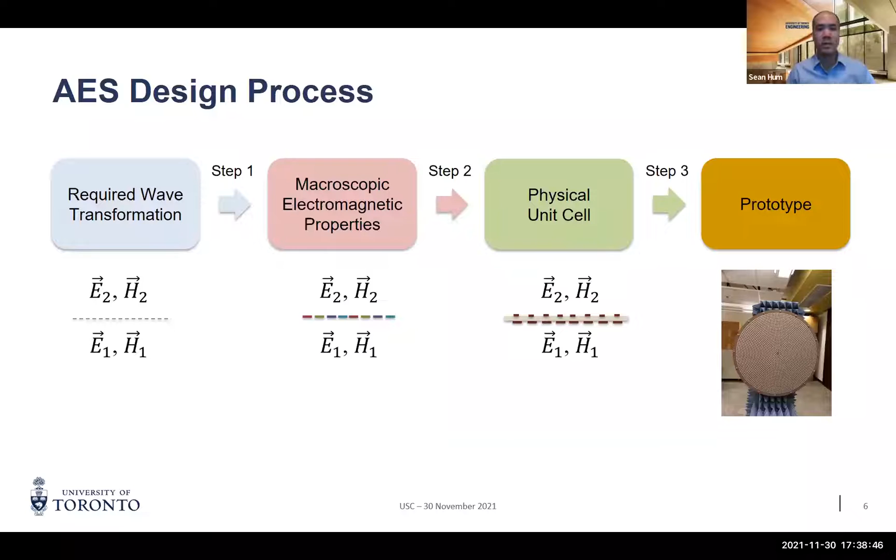Then you need to translate that, after step 2, into a physical unit cell composed of dielectrics and conductors that actually carries that out. And then, of course, the last step is to prototype it. So the talk today is really going to talk about all of these steps, and that's roughly how I've organized the presentation.

We'll start with the macroscopic step, which uses optimization methods to accomplish that. Then I'll talk about two different unique design methods for the microscopic step, one using equivalent circuit models, which are nice and easy to understand and build a physical intuition around how these surfaces work, and then a more advanced topic using a data analytic approach based on machine learning. At the end, I'll show you some experimental realizations of these surfaces.

So let's begin with the first step, which is the macroscopic step. This really concerns the design of the AES's surface parameters. We can use a variety of parameters to define an AES. For example, we can use surface impedance, surface admittance, and electromagnetic coupling coefficient, if we have bianisotropy, to define a surface.

We could use susceptibilities, both electric and magnetic susceptibilities, to define the surface. We could use polarizabilities. We can even use S parameters or other network parameters to define how a surface works. And all of these parameters are functions of position. As we walk around the surface, they spatially vary to accomplish some sort of transformation of the field. They could be uniform, in the case of something like an FSS, but generally they vary as a function of the atomic position.

And I'd point out that all of these surface parameter descriptions are interchangeable. So some people like to use susceptibilities, some people prefer to use surface impedances. You can convert from one to another. In fact, in the old days, sometimes we just defined things in terms of the phase gradient that we want to realize from the surface. But nowadays, we tend to focus more on these mathematical descriptors of the surface.

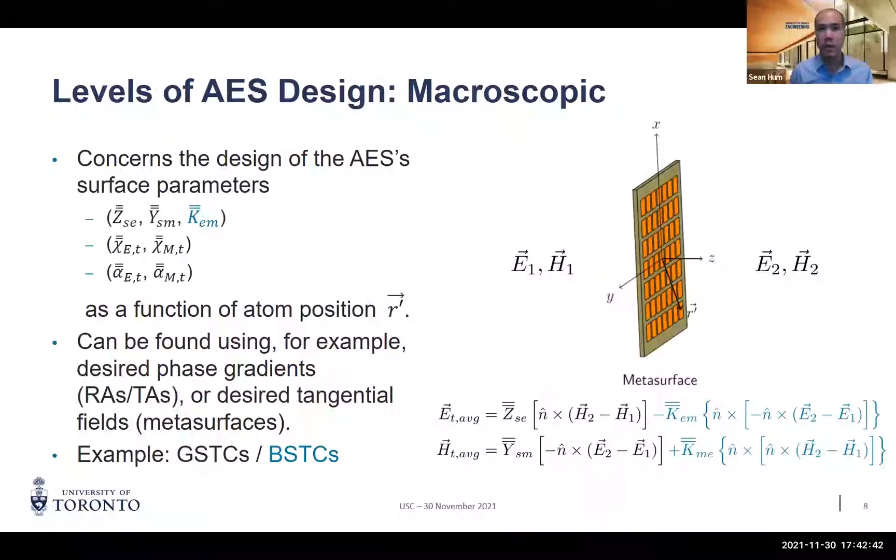So without knowledge of the exact tangential fields at the surface, we can't go and solve these equations for the surface parameters, right? Because we actually don't know E2 and H2. And even if we did know E2 and H2, it can still be complicated because you have mutual coupling between the elements in the surface. And if that mutual coupling is significant, then one element can affect the response somewhere else on the surface. And then the surface is what we call a non-local response, and that complicates the design.

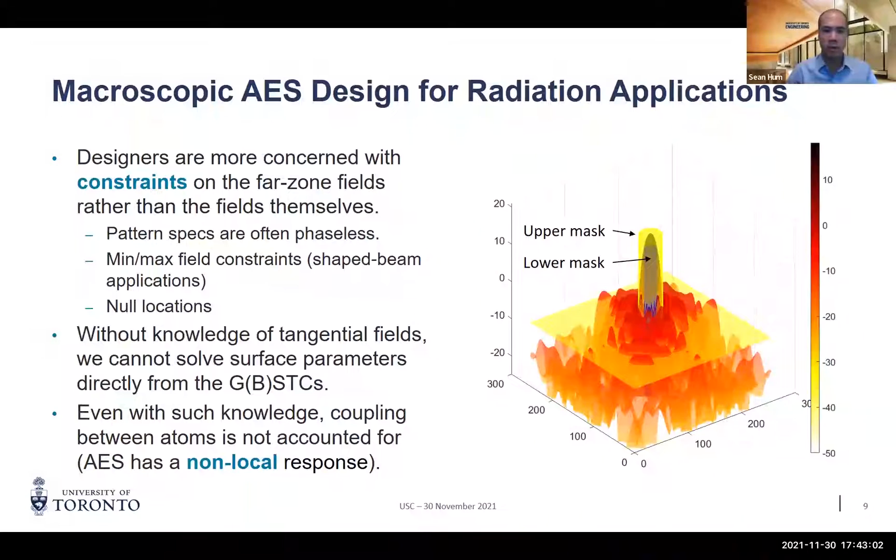So the macroscopic design step is designed to try to address this. At the microscopic level, this is really where the black art or black magic around designing electromagnetic surfaces comes in. You can see these many weird and wonderful ways of inventing the atoms in these metasurfaces. And generally their design requires tedious analysis and a full wave simulation package. You adjust some parameter or some configuration of the scatterer, and then you run the simulation again, and you see if you've achieved the surface parameters that you're looking for.

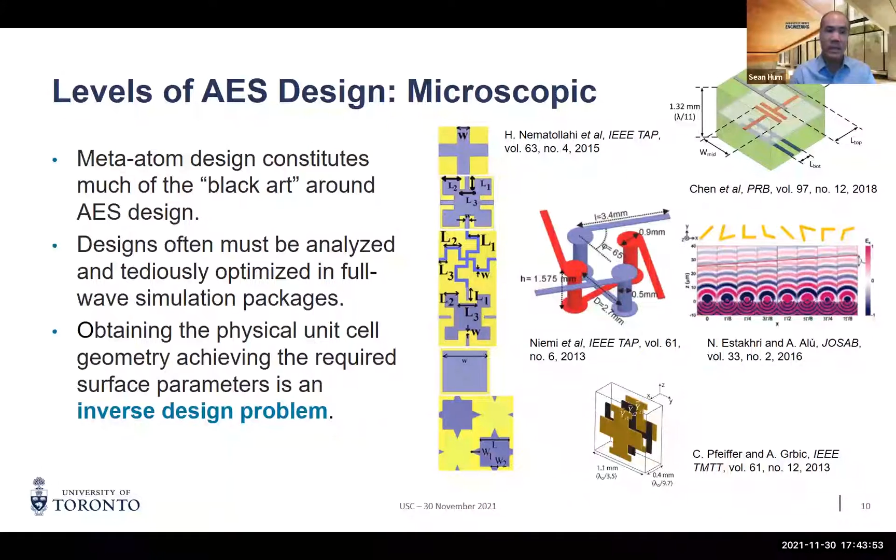So ultimately, as a designer, our goal is really to do the opposite, right? We would like to specify what the surface parameters are and have a tool that spits out what are the geometrical dimensions of the scatterer, right? And that's called an inverse design problem. We're going to be looking at that in a bit more detail later.

Before we get into that, I'll talk about the macroscopic design step. To accomplish this, we've been using optimization methods inspired by convex optimization, but that we've had to relax using Lagrangian methods. So as I said before, the usual process is: if you know the field transformation that you want to accomplish with the surface, then it's easy. You know the tangential fields on both sides of the surface, and you can determine the appropriate surface parameters that the surface needs to realize.

In this talk, I'm going to focus on this impedance and surface impedance, surface admittance, and electromagnetic coupling coefficient tensors to describe the surface. So knowing the fields, we can then solve for the electric and magnetic currents on the surface, and then solve for these surface parameters. And this has been done before by others.

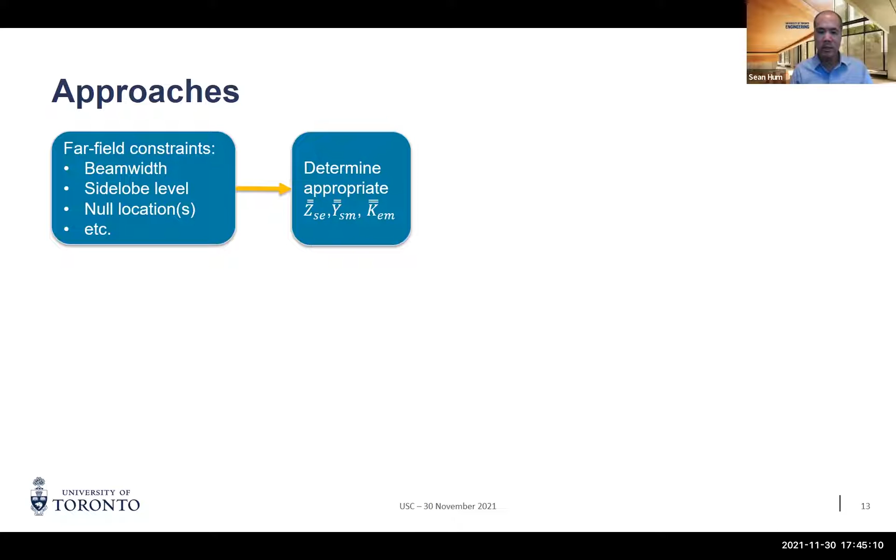So what we want to do is get away from that and actually just constrain what the fields E2 and H2 are going to be. We talked about what some of those constraints look like already. We might specify the beam width or side lobe level or null location, something less specific than specifying the field itself. But now we don't know the tangential fields, we only have these far zone constraints. And so now we've got a problem in trying to determine these surface parameters.

So there have been some approaches in the past to try to circumvent this problem. In the field of reflectarrays, there are these phase-only synthesis procedures based on intersection methods that try to solve for the reflectarray elements as a function of position that you need to realize a specific phase or a radiation mask. Our approach is a little different. We want to try to modernize this and bring techniques such as that into the world of metasurfaces, where we actually have control over 3 sets of parameters, not just the phase: Zse, Ysm, and Kem.

Our approach is to try to use convex optimization to determine these surface parameters from far field criteria. I say attempt because we can't actually use a convex method directly.

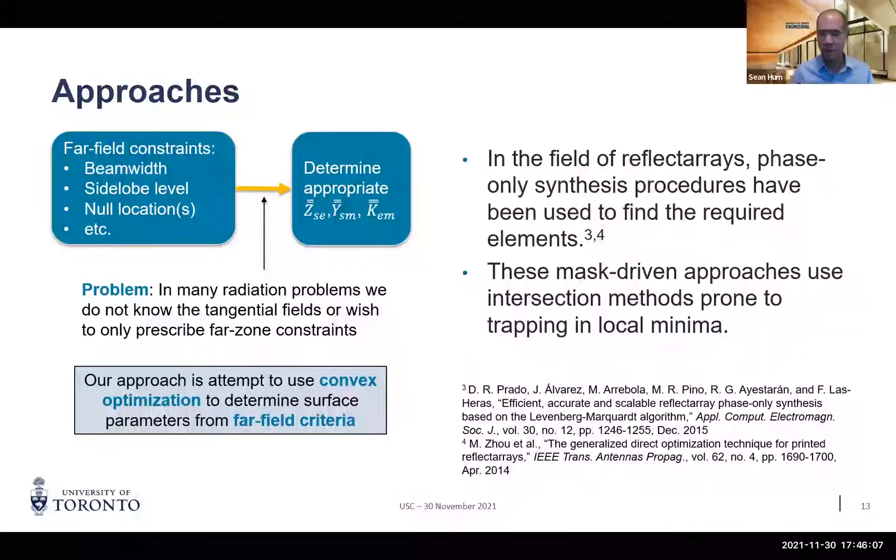Let's start with a system description, and we'll do this in 2 dimensions to make it easier. Here's our AES lying along the y-axis, and we'll subject it to some incident field, and there'll be a reflected field generated and a refracted field, and they might be plane waves, they might not, but this is just a general diagram. And we have the electric field integral equation here relating and constraining basically the electric field at the location of the surface, or the tangential fields at the location of the surface.

So we know that the sum of the incident and the scattered field has to be equal to this sum of products here, where again we see the surface parameters, 2 sets of the surface parameters entering into the electric field integral equation. So we may have electric surface current densities as well as magnetic surface current densities on the surface. The scattered field we can compute knowing the electric surface current density, and we just use a 2D Green's function to compute that.

What we'll do is break these surface currents, J sub Z and M sub Y in this 2D example, and express them as a superposition of basis functions, because our goal is to form a linear system of equations a la the method of moments to form a 2D description of our system. So we'll break down the electric surface current density into a series of basis functions, and use the same basis functions for the magnetic surface current density.

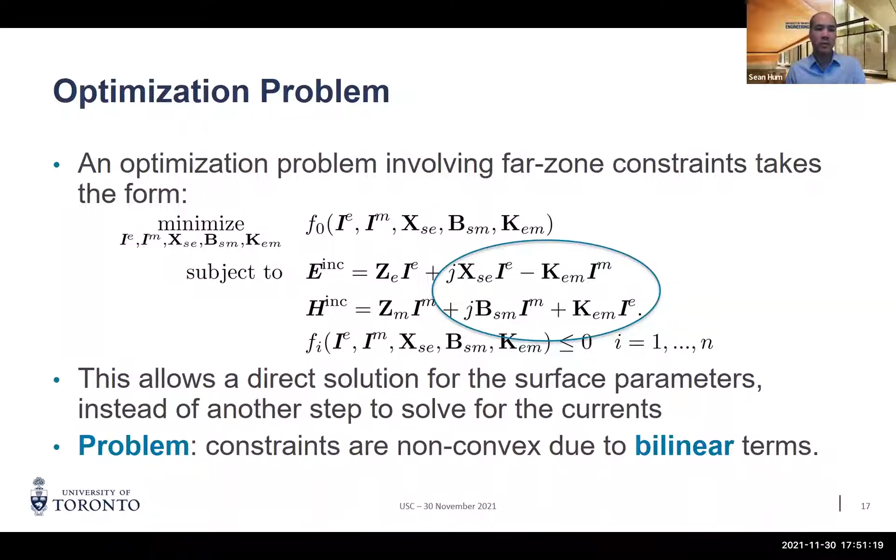We're actually multiplying two of our unknown quantities together, right? So this is called a bilinear variable. This makes the problem non-convex, and we need to find a way to solve this optimization problem by some other way. So what we do is we relax it, and a relaxation is a way to solve a non-convex problem by enlarging the solution space.

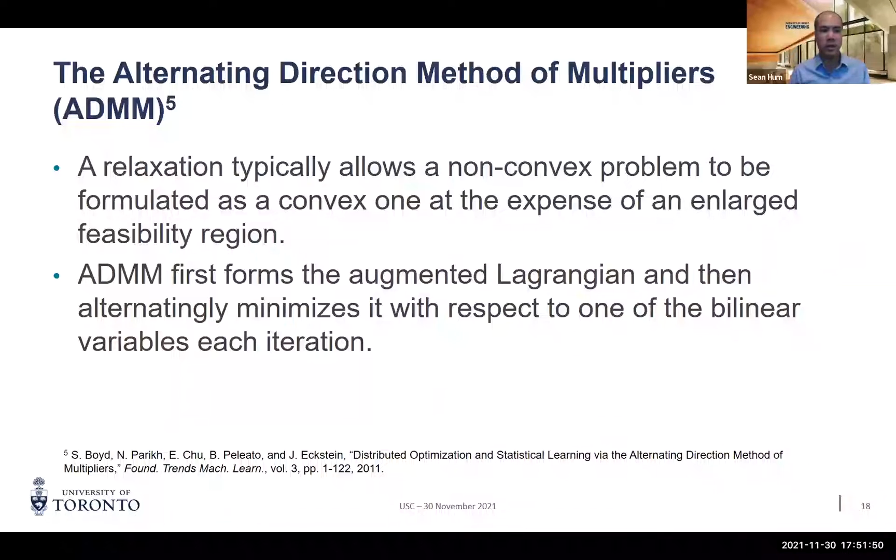We use a special technique called the alternating direction method of multipliers, ADMM, that forms a dual problem, an augmented Lagrangian, and alternatingly minimizes it with respect to one set of the bilinear variables at each iteration. So if we return to our problem here, this is the one we showed earlier. The so-called dual problem of this is minimizing this Lagrangian here. And if you solve the dual problem, you solve the primal problem.

Here's a dual problem where we're trying to solve for just the currents in this optimization problem. It's called an augmented Lagrangian because we actually add these penalty terms to improve the convergence of the optimizer. So that's what makes it ADMM. In this step, we solve for the surface currents, but then in the next iteration we'll try to solve for these surface parameters, and we just alternate back and forth. That's why it's called ADMM.

So this is a big, ugly flowchart of what the algorithm actually looks like. This is one iteration solving for the currents, and then the next iteration solving for the other set of variables, the surface parameters, updating the problem, checking for convergence, and then looping back and repeating until this optimization problem hopefully converges on a solution.

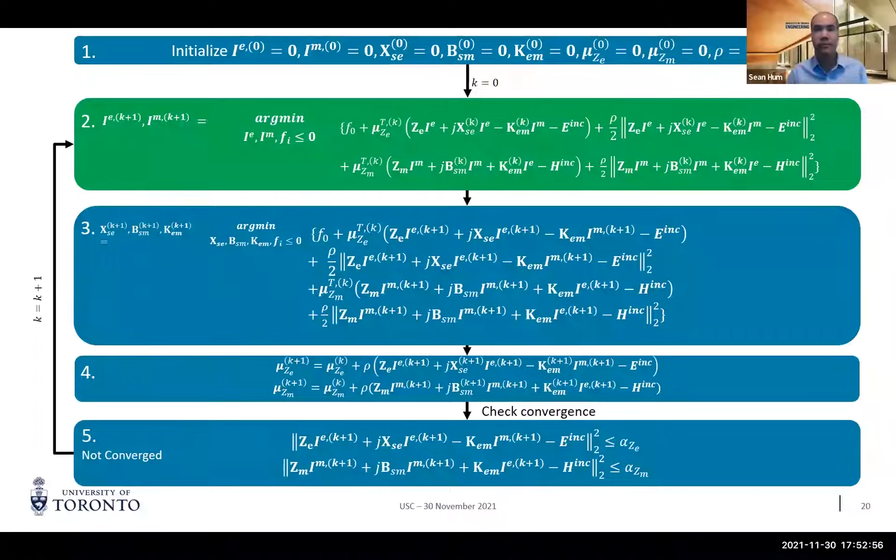So we need to define this cost function now, F naught. And this is where we put our antenna hats on, right? So what sort of things might we want to do? We might, for example, want to form a beam in a certain direction.

So what we can do is say, okay, let's form a beam in this direction with some certain amplitude. If you look at the first three terms in this expression, this is just the total field produced by the surface. So if we subtract the desired electric field level from this, our goal would be to minimize this norm in the direction phi naught, and that should produce the beam that we want.

Null forming is even easier to understand. We just want to take the total field here and make it zero at some angle phi n. So this is an easy cost function to understand.

Another very common one is enforcing a maximum permissible side lobe level, which we can call tau. Again, we could just take the total field in some side lobe region and say we're not allowed to exceed tau in this interval. Sometimes we throw in a slack variable here to make it a little easier to optimize. So these are examples of constraints and cost functions we can introduce in the problem to solve a specific antenna problem.

And we can also even make the surface currents smooth by adding a cost function for that, just to make sure the surface is realizable in the end. Because if we have sharply varying currents, that's probably going to lead to sharply varying surface parameters, which are hard to realize.

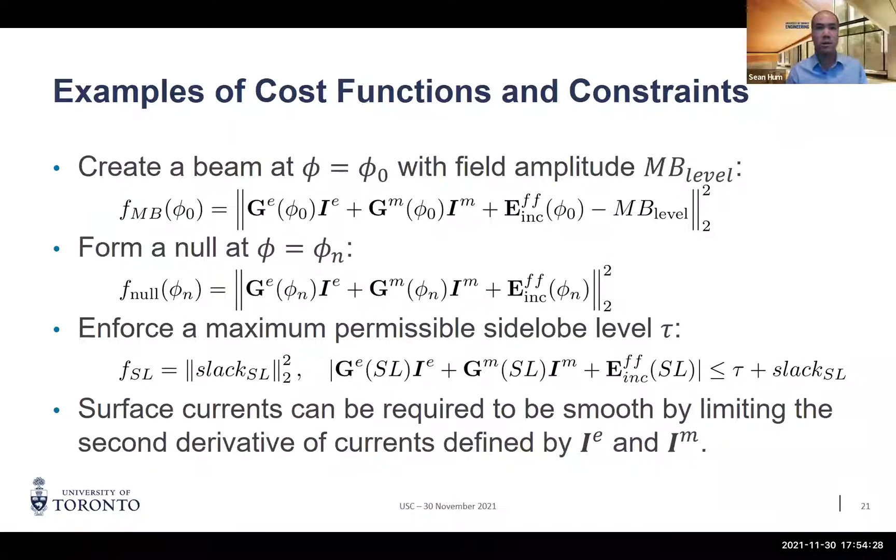So here's an example of a multi-criteria optimization problem that we threw at this optimizer. We said, okay, let's take a 15 wavelength surface and ask it to take an incident plane wave and divert it in 3 different directions, which you see given in the table here. The main beam level was specified, and then we also constrained the side lobe level to not exceed the green lines that you see in the figure.

We specified some null angles, which you can't see in this polar plot because they're at the center, and then we put a curvature constraint on the current. This is the pattern that the optimizer came up with along with the surface parameters, which I haven't plotted here. So now we know the surface parameters as a function of position as we walk along the AES, and if we illuminate it with a plane wave at normal incidence, it will produce this interesting pattern.

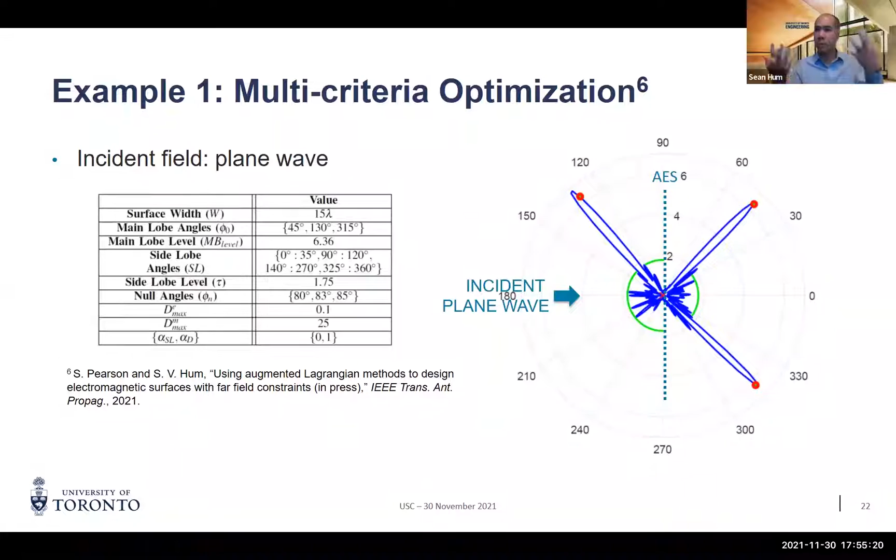We chose this specific example because edge effects become very prominent in such an electrically short surface, so mutual coupling between all of the elements is now a big deal. Classic methods don't deal with the mutual coupling between atoms in the design, but the optimizer has that built in, so it should be able to correct for the mutual coupling on its own.

Just some remarks to close out this part on the macroscopic design process: I think it's a very useful and flexible framework that allows designers to use these AESs in a very practical way without having to have any prior knowledge of the radiated fields.

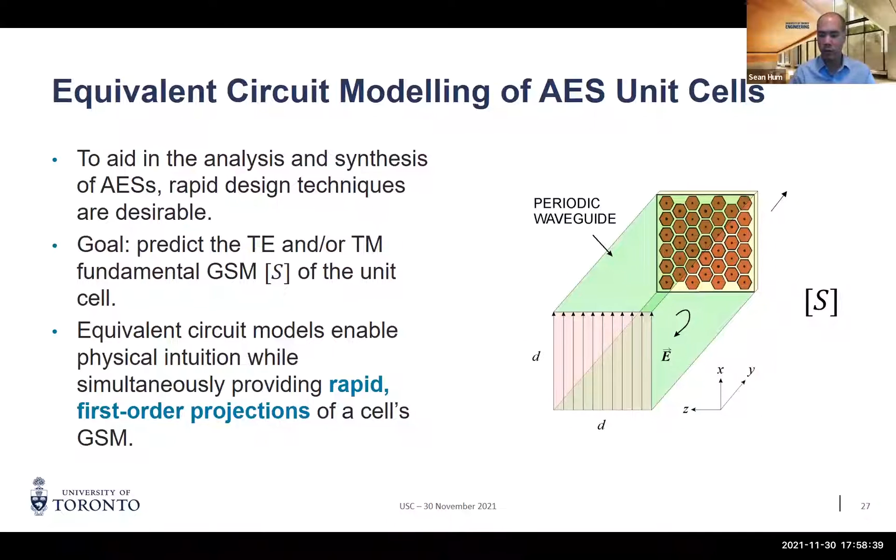Maybe it's not as accurate as a full wave tool, but our goal is to provide rapid first order projections of the response of the cell that helps the designer get started. Then if you want to refine things later with a full wave tool, you can do that.

Our starting point for the equivalent circuit model is this simple dipole problem—a driven dipole in a periodic array, like a phased array, a dipole that could be printed on a substrate or not. That doesn't really matter here, but it's in a periodic environment. I chose a dipole because the current distribution is principally X polarized, so we don't have to worry about the other components of the current density quite yet.

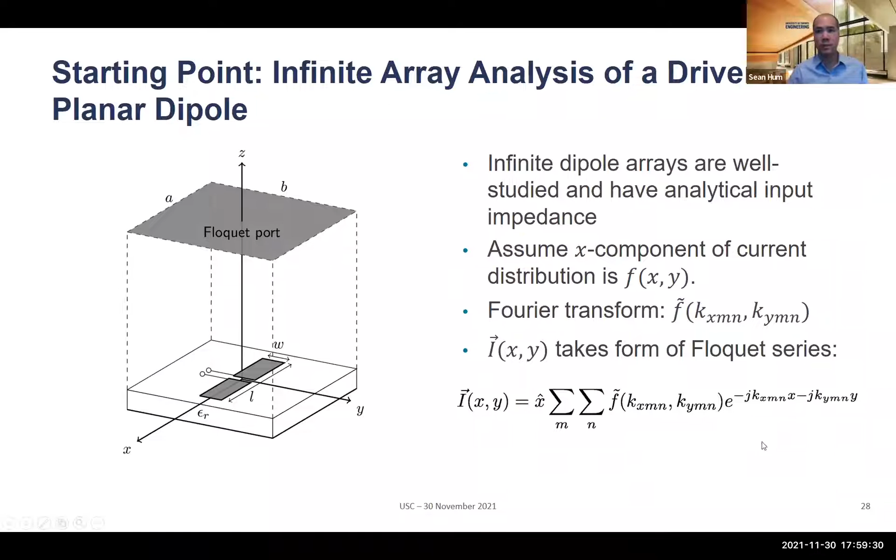Let's say the X component of the current distribution is this function F, which might vary as a function of X and Y over the dipole, and let's say F has a Fourier transform F tilde. Then we can express the current distribution on our dipole as a Floquet series, because of the periodic nature of the problem. Now let's assume F is separable, so the variation of the current distribution has a function describing how it varies with X, which we'll call G, and a function describing how it varies with Y, which we'll call H.

This is a textbook problem discussed in this book, of deriving the input impedance seen looking into this dipole—this is the active input impedance. The expression looks like this, and what's nice is it's a completely analytical expression, knowing the Fourier transform of the current distribution on the dipole. Generally we know what that current distribution looks like, so we can compute its Fourier transform, and then we can analytically predict the input impedance.

I'll describe what some of these terms in this equation are. Capital G and H are the Fourier transforms of little g and little h evaluated at the Floquet wave numbers. The terms in the denominator, Y sub mn, TE and TM, these are admittances or normalized wave admittances. If we imagine standing on the surface, at the surface of the dipole, what wave admittance do we see at that point?

We see a wave admittance looking upward, because above this dipole is free space. And we see a wave admittance looking downward, which in this problem, there's a substrate here and it's grounded. So we see a grounded dielectric substrate. And so the circuit looks like this: looking down, we see this transmission line that's been shorted out. Looking up, we see an infinite transmission line.

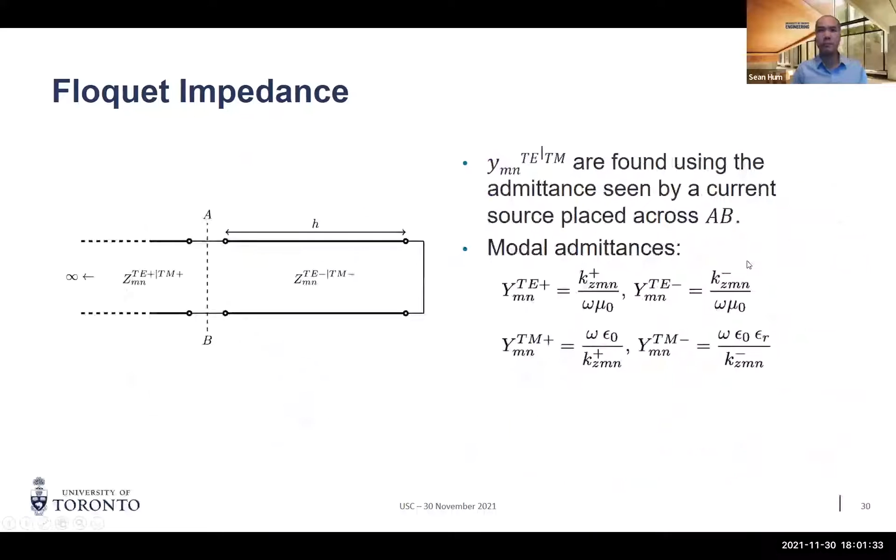So the reason these expressions in the denominator are so important is that I can take this expression for ZFL here, and simplify it. We're going to write it like we see up here and just leave the terms in the denominator, then collect everything else into these terms that you see here, T super TE and T super TM. You can see what's balled up in TTE and TTM here.

What's useful about this form of the input impedance is that it suggests an equivalent circuit that you see here. Because what are we doing? We're taking a bunch of impedances and we're adding them all together. So it's a series combination of impedances.

But we're doing more than that. We're taking this impedance, this 1 over Y, and then we're multiplying it by a term that reminds us of a transformer. We're taking a transformer, and if the transformer turns ratio is root n, then we scale the impedance by n. So these transformer turns ratios, these T's, appear and take that modal admittance that I described to you on the previous page, where you have a short-circuited transmission line here and an infinite line here in parallel. And then we have to transform that before it can be seen by ZFL here.

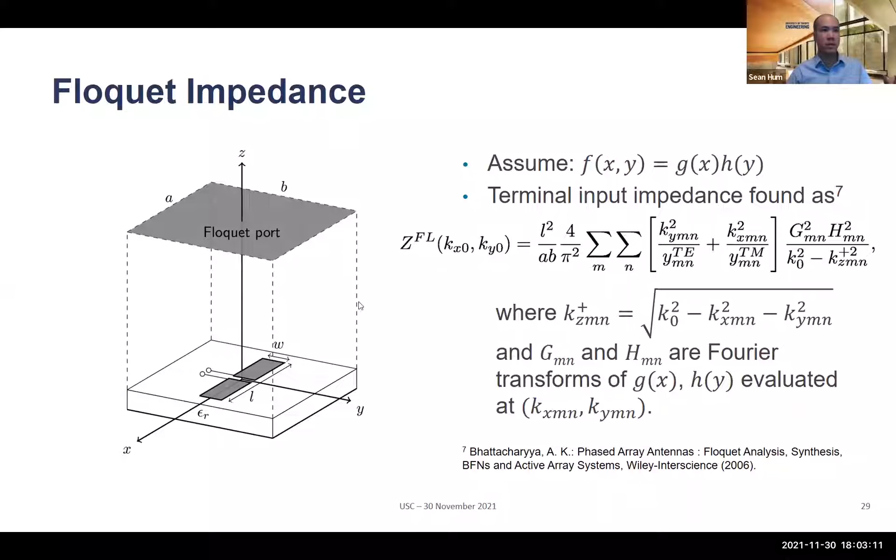So this is the basis of the equivalent circuit moving forward. But this is for a driven problem. We're driving this dipole and we're seeing what is the active input impedance or active reflection coefficient seen looking into this, which is a very useful problem for phased arrays. But in AESs, we don't usually drive them like this. We usually illuminate them from above or below.

So we can modify this equivalent circuit to analyze not this driven dipole problem. We'll take away these terminals and maybe replace that with a load, but now we can illuminate this dipole from the Floquet port. And then we're interested in what is the reflection coefficient seen at the Floquet port, or what is the transmission coefficient if this was a transmitting surface on the other side here. And that allows us to form the generalized scattering matrix of this periodic structure.

So all we have to do is we're not driving this dipole anymore. In fact, we could put a load here or not, but we'll keep it general and put a load impedance, maybe even a reconfigurable one. What we'll do is look into one of these ports here, like we were looking into this infinite transmission line. Now we're illuminating from one of those transmission lines, with a specific mode, maybe the TE00 mode. And we'll look at what that Floquet port sees. That could be the input impedance, which allows us to compute input reflection coefficient, which is the S11 for the TE00 mode.

So this turns out to work quite well. We initially used it for reconfigurable reflectarray elements, these patch-like elements that you see here, where we put a varactor diode to implement a variable capacitance across this gap region. Here it's a distributed capacitance just for simplicity, but you can see some dimensions of a patch here. As we vary this load capacitance placed across this region, you can see that the equivalent circuit model aligns very, very well with a full wave method of moments simulation that takes much longer to run. And you can get the so-called S-curve for the reflectarray element in this way. That's really great for reflectarray designers.

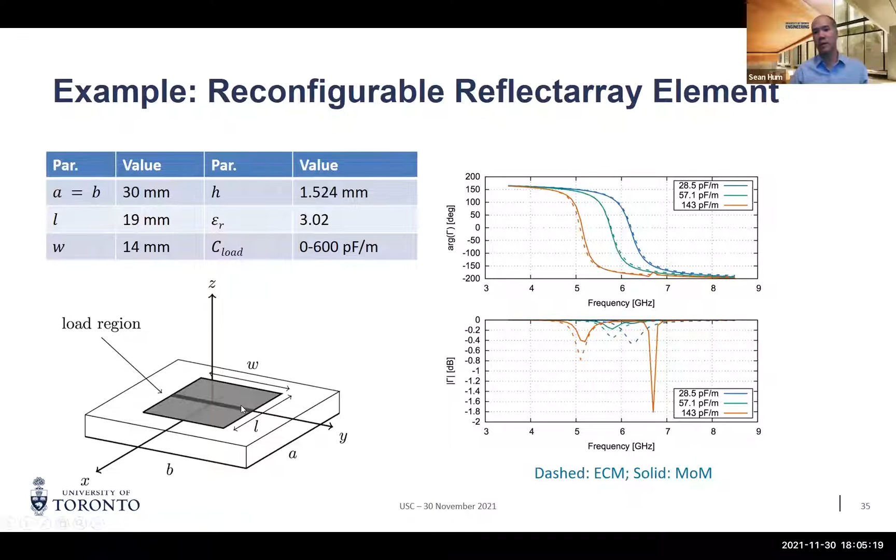The equivalent circuit I just showed you only supported a current density that was X polarized. So what if we had a more complicated scatterer that had X and Y components for the surface current density? We can modify this technique to handle vectorial current distributions and treat it as a waveguide discontinuity problem that maintains continuity of the power density across the surface. The transformer turns ratios end up being modified. Now we need to know the Fourier transform of the X component of the current distribution as well as the Y component, but otherwise it looks a lot like what we had before. So now we can analyze AES elements that have surface currents with X and Y components.

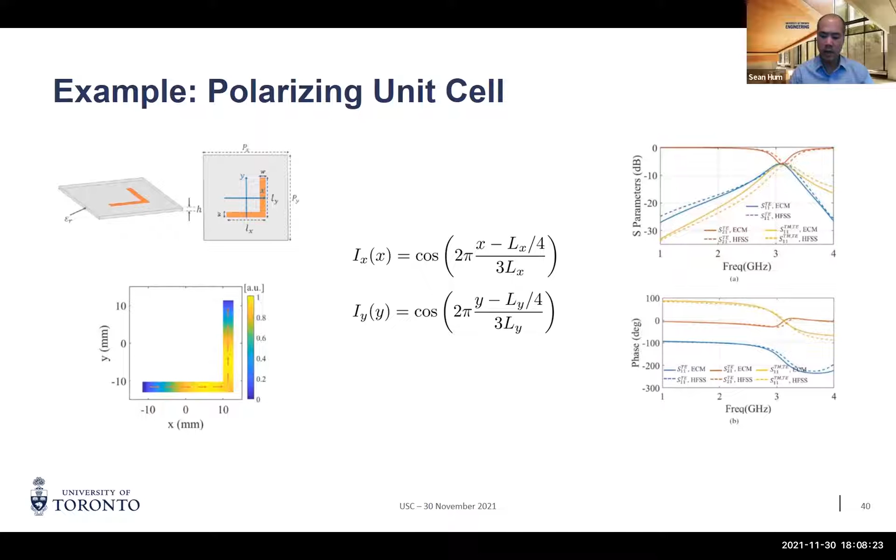So in closing, I think these equivalent circuit models are very handy because they're fast and they give us some insight, because they force the designer to think about what the current distribution is going to look like on the atom that I'm designing. And that's both good and bad. It's good because we should be thinking about these things. It's bad in that you need to form somewhat realistic expressions for these current distributions for this technique to work, so if you're inexperienced, that might be a little bit harder to do.

That inspires the next part of the talk, where we're going to try to address this inverse design problem I indicated at the beginning of the talk more directly. So our approach here is actually to use machine learning for this, and that's not because everyone's doing machine learning these days, but because I honestly feel it has something to offer here. We've seen that machine learning has been very useful as a material discovery platform in other fields. There's this open quantum material database that's used machine learning to devise new quantum materials, and the same thing in the pharmaceutical industry. Metasurfaces are basically 2D versions of metamaterials, so they're materials too. Can we apply material informatics techniques to metamaterials?

The goal is not to really turn metasurface design into a black box where you push a button and we all become monkeys, but really leverage what machine learning can offer here to explore the design space more efficiently than perhaps a human designer could. Then we can look at what machine learning came up with and maybe learn ourselves a bit more about the physics of the problem.

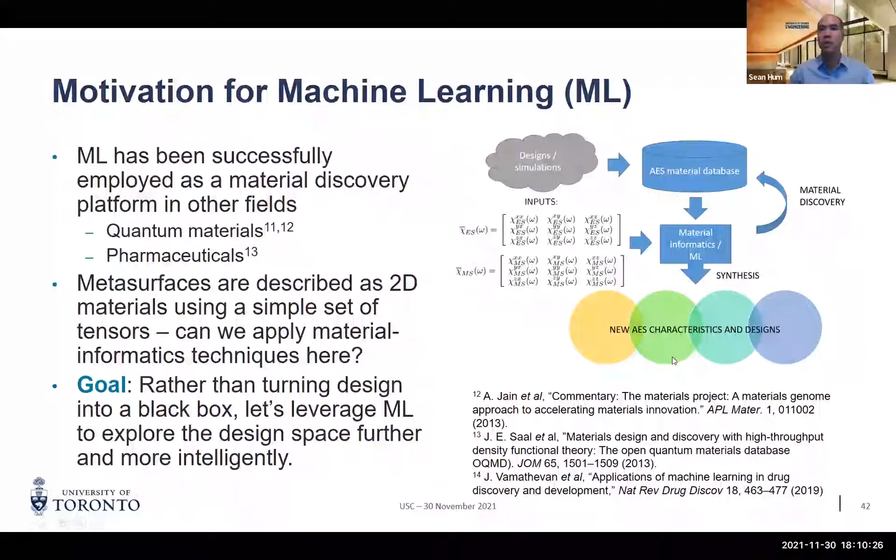This is an interesting problem because the forward problem is: I go into HFSS or whatever, draw my scatterer, run a simulation, and get the macroscopic properties out. This is called a many-to-one mapping, because there are many different things I could draw in HFSS, and I get one thing out, the EM properties. So I could use simulations for that, but I can also use machine learning.

There are what are called surrogate models that try to learn from the results of the full wave simulation, so that when you present it with some structure you want to simulate, the neural network tries to predict what the response is instead of the simulator. That's a surrogate model, and it can be useful because surrogate models are faster than full wave simulators, but you need to train them first.

The other way is what we want to do: inverse design. I say, I want these susceptibilities, give me a physical unit cell that provides that. The problem is that this is a one-to-many problem. I've given you a specific set of macroscopic properties that I want, and there could be an infinite number of physical unit cells that give you the exact same response.

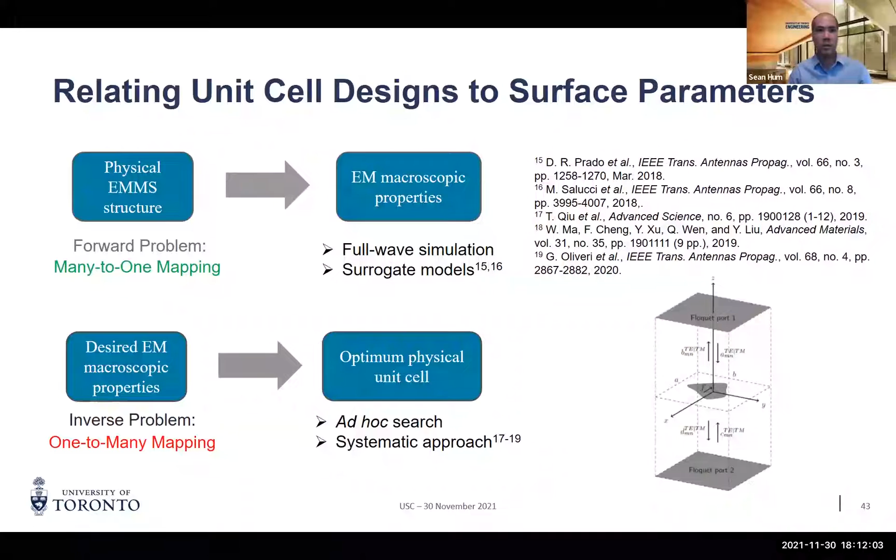And so a neural network is not designed to be a one-to-many system. It's supposed to have a single output for a certain input that is given. So this complicates things. Still, you can do ad hoc searches of the solutions that a machine learning algorithm gives you, or take a more systematic approach to incorporating machine learning to address this problem. That's what we're going to talk about in this talk.

So the philosophy of the approach is to replace this tedious process with a more streamlined one. Normally, a designer would have to decide how many layers, what the scatterer shapes will be, what their dimensions will be. Once I've decided all that, I simulate it and see if I've reached my goal. If not, then it's time to burn the midnight oil and fire up more simulations. So it's time consuming, resource demanding, and requires experience to adjust these parameters as you go.

So the proposed approach is to explore the design space more efficiently, more intelligently, exploit it, and at the same time make use of surrogate models to speed this whole process up. It should be more explorative and automated. It just has this cost, this asterisk, which is the one-time data generation cost to train the network.

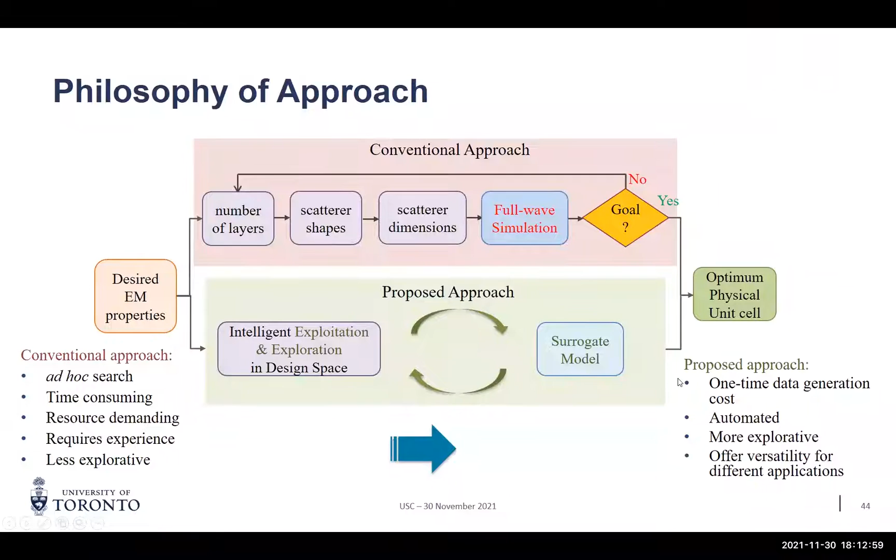That's no easy task. First of all, these metasurfaces are very thin, and we generally use multi-layer surfaces for our designs to get the bianisotropy that we want, so you need a lot of data. The nature of the design space complicates things too, because first of all, the design space is very high dimensional - you have all these different scatterers, all these dimensions you could change. So there's a lot of things you can tweak.

The design space is also categorical. I might say I've got this database of cross-based atoms, maybe ring-based atoms, patch-like atoms, maybe complementary structures, disc-shaped atoms. Those are all categories of scatterer shapes. And our optimum solution might be none of these - it might lie in the space between, but the network was trained on something that was categorical.

Of course, if we look at the loss function we're trying to maximize or minimize, this is a varied landscape of maxima and minima that makes finding the global solution problematic, and our initial design space might even be incomplete. So this really makes for a tough go for optimization.

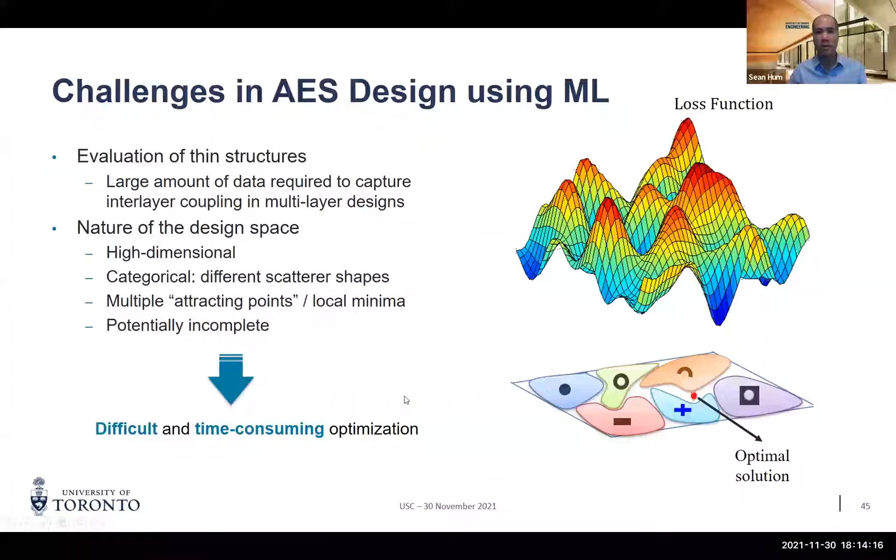Our first approach that I'll present here is to try to accelerate this process using a surrogate model, to accelerate the calculation of the generalized scattering matrix.

Here I show you a 3-layer metasurface or AES unit cell, made up of 3 different metal shapes separated by dielectrics. We know the frequency we want to analyze, and this surrogate model tries to spit out the amplitude and phase of the fundamental components of the GSM of this unit cell. So we try to train this deep neural network to do so.

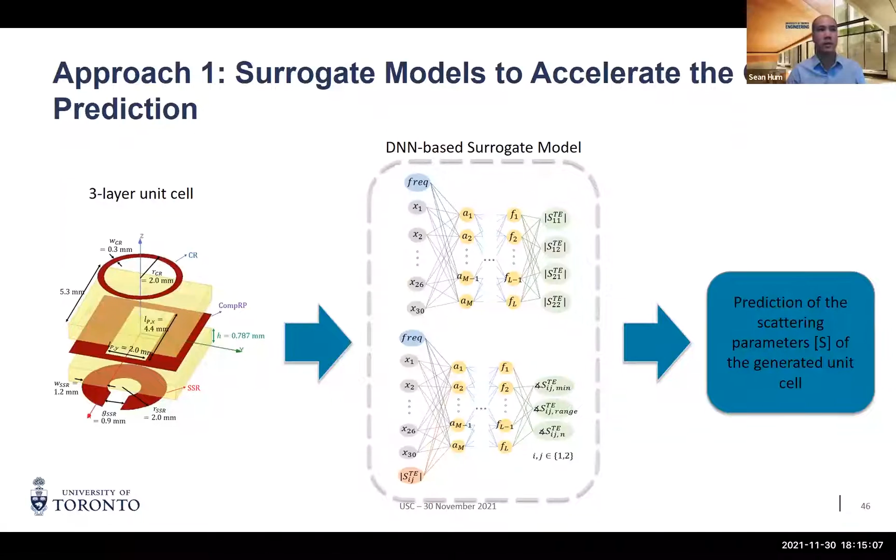The idea being that if we can train the neural network to do this accurately, it can replace the full wave simulator. So we train this surrogate model with a variety of what I call primitives, and we used 7 of them here. This is based on our own experience — we find these atom shapes work very well for solving a variety of AES problems. So essentially we're curating the training data to help our neural network along.

What we do is take these primitives and form them into multi-layer surfaces that you see here. This is a 3-layer version, just by cascading the GSMs of multiple primitives together. This also provides a lot of efficiency.

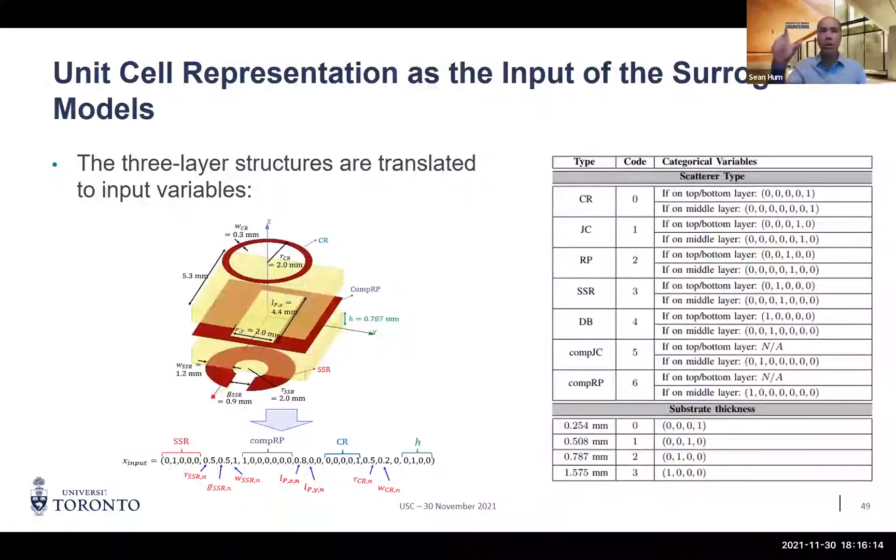So our resulting solution space has designs where the scatter is categorical, since we started with only these 7 different classes of scatter, but the scatter dimensions themselves, parameterized in the picture here, are all continuously variable. We also have the substrates to deal with, with varying parameters and thicknesses, and the number of layers in our stack is a variable too. So we encode all of this into an input variable fed into our surrogate model.

I won't spend too much time on that. Then we use a more typical optimizer to check our unit cell, propose a unit cell, evaluate it using these rapid surrogate models, and see if we've got the surface properties we want in order to converge on the cell that's going to do the job for us.

Now I'm going to combine the micro step and the macro step together and show you what we can do. This is both methods, the optimization method and the machine learning method, coming together to synthesize a multi-beam AES. It's 15 wavelengths long, operating in the X-band, and it's supposed to take a line source very close to the metasurface and create 2 beams, one at -10 degrees, one at 20 degrees. This is a 2D problem.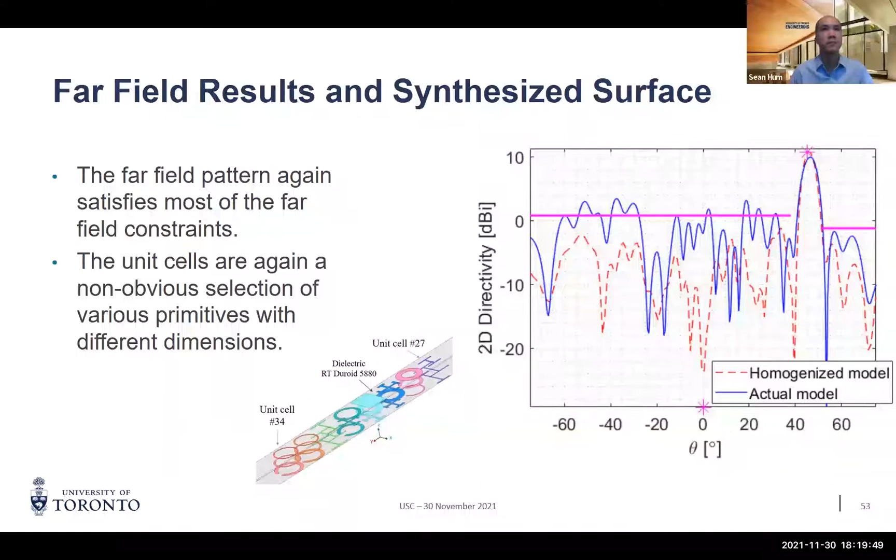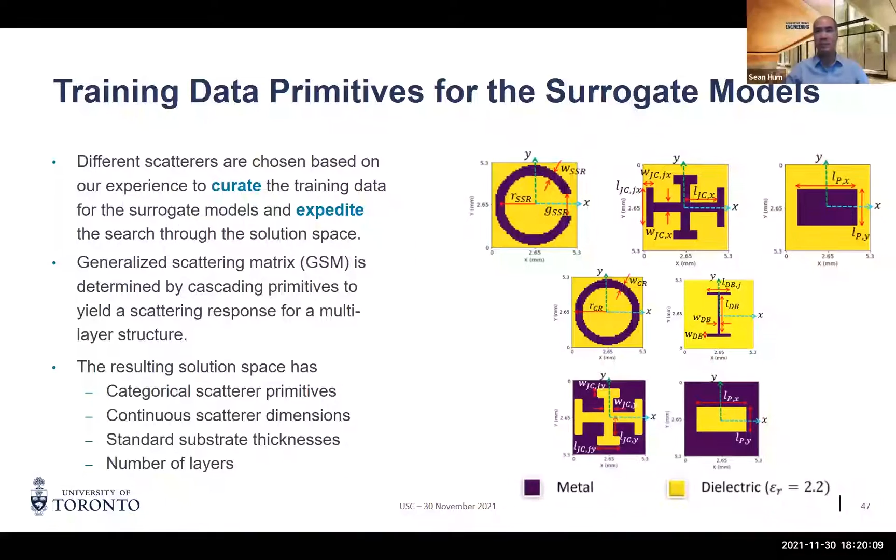So the last part of the machine learning part I will talk about is a more generative approach to these cells. This approach that I showed you here was basically just suggesting atoms that are made up of these 7 primitives, right? There's no real generation aside from the fact that it specifies exactly the dimensions of these structures and where they're supposed to go. But we would like to invent new metasurface geometries, right? So we need a generative model for that.

Maybe you guys have heard of GANs. That's one example of a generative adversarial network, but we're actually using what's called an autoencoder, a variational autoencoder for this. And autoencoders are useful because they take a high dimensional variable and they can compress them down into a low dimensional latent space. And that's useful for optimization, right? I don't want to optimize over this massive high dimensional space. I'd much rather optimize over a smaller dimensional space.

But we use a special autoencoder called the Variational Autoencoder, or beta VAE, which allows us to become much more statistical. So it actually tries to model the PDF of the input in addition to the input itself. And it tries to predict the mean and standard deviation of that PDF, assuming that it's normally distributed. And that's useful because now it allows us to draw samples from this distribution, random numbers, right? And then feed that to the decoder, which then can now invent new geometries that didn't exist in our original training space, right? So this is a very interesting machine learning generative algorithm.

It has a loss function that comprises what we call a reconstruction loss and a KL, Kullback-Leibler, divergence loss. This first term is to minimize the reconstruction loss between X and X hat, right? Like if I feed in a representation of a unit cell, I expect to get that back out. So that should be accurate. Whereas this KL loss is really designed to make sure that the latent space is regularized in such a way that it's close to a normal distribution with zero mean and a standard deviation of 1 that you see here.

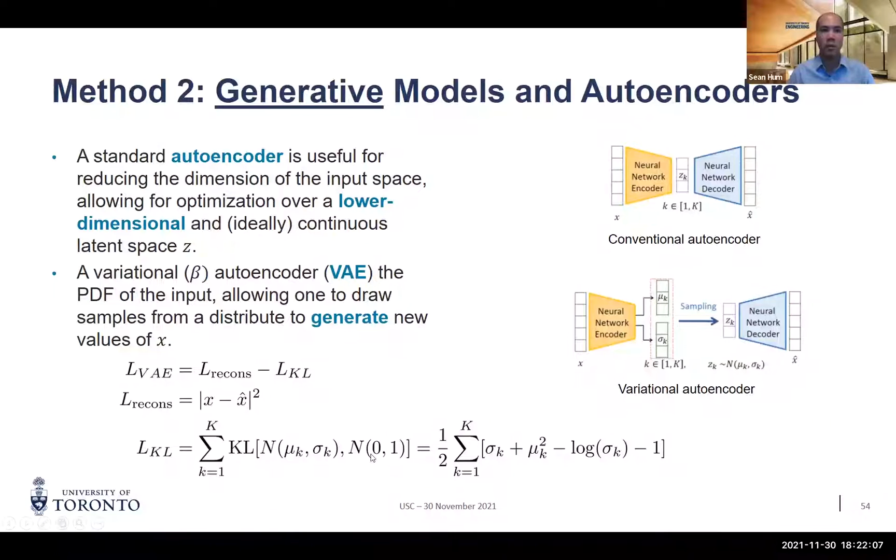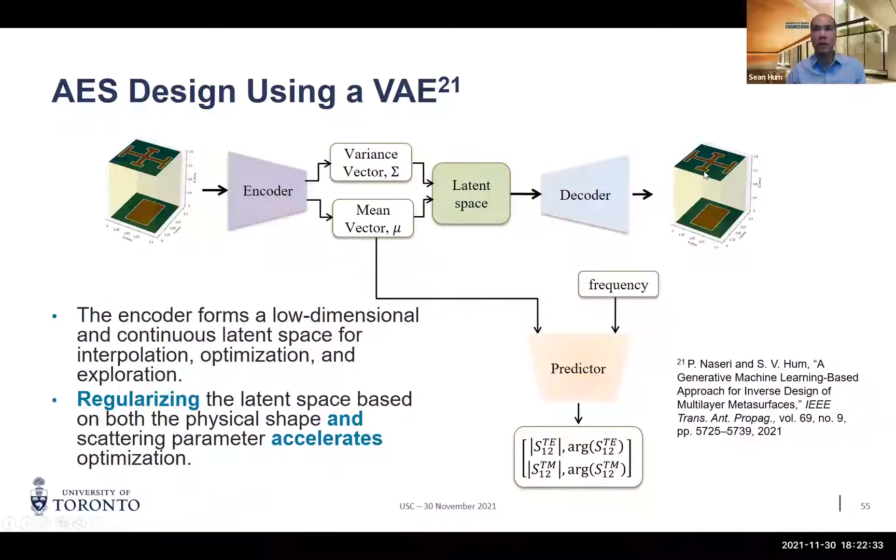So then to put it all together, we represent our AES unit cell, we encode it into this latent space, and then we draw a sample of that latent space and try to predict what the S parameters are at a particular frequency. And once we've got the S parameters that we want, then we can feed that back into the decoder to get whatever our structure is supposed to be.

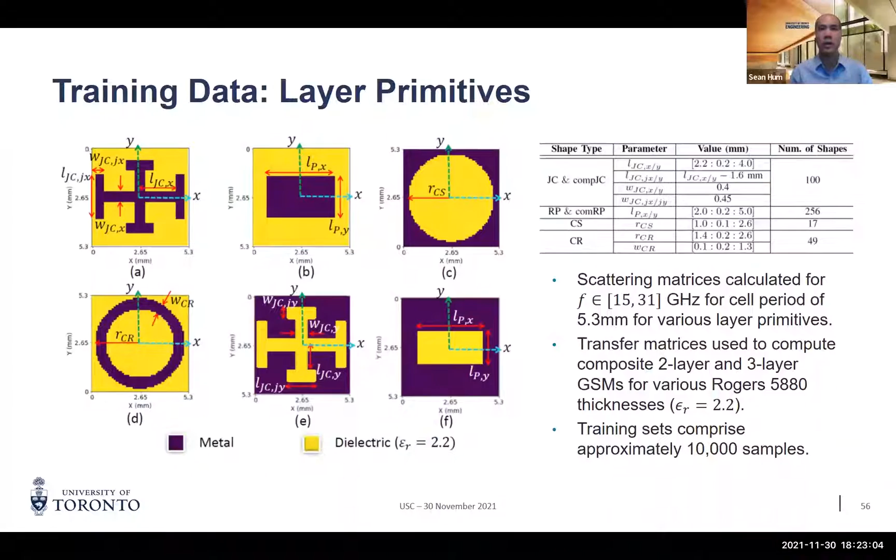So that's done by training this VAE with actually the same primitives that you saw earlier as starters, basically, to help get it started with this. We use 2 and 3 layer structures, again, just using some standard Rogers substrates to populate the database. Our training set is about 10,000 samples of these various primitives that you see here cascaded together to form 2 or 3 layer surfaces. And we also use PSO for this step.

We basically try to realize certain S parameters from this AES. And then if we're not there yet, then we take a loop through the optimizer and we try to update this latent variable, predict what the S parameters are supposed to be. And if it's converged, then we're done, decode it and get the surface, the atom design. And if not, then go around once again.

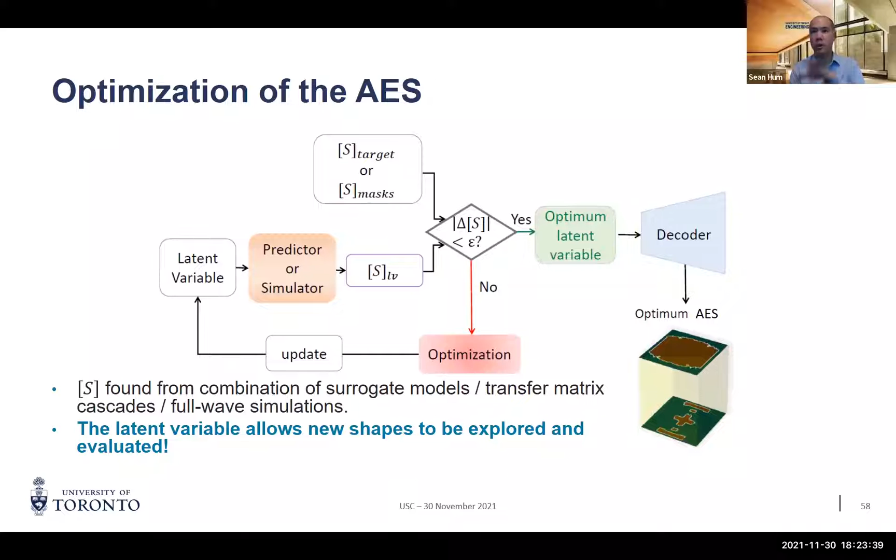So what we hope to do is get brand new atom designs that you see here that did not exist in the training space at all. So we hope to get these weird and wonderful shapes. So here's a couple of examples.

We use masks to define, in terms of the magnitude response here, where we want, for example, the TE transmission coefficient to lie between. So we wanted basically the S21 for the TE response to lie between the orange and the green line. And you can see that our optimizer has done a fairly good job at doing that. And this is the design it came up with.

And you might say, well, that doesn't look all that exciting. It looks like something that was in the input space, but it actually wasn't, because the dimensions of this Jerusalem cross or pair of crosses you see here wasn't actually in the training data. This is a polarizer that's designed to take an incident linearly polarized wave and turn it into CP.

So in terms of masks, we say that in a certain frequency interval, we don't want the insertion loss to be too large between the TE and TM components, and we want the phase difference to be 90 degrees for CP. You can see it's come up with this design, and when we look at the axial ratio of this polarizer, it's pretty good over a pretty wide frequency range, 20 to 30 gigahertz, not bad. Pretty good cross-pol characteristics. This design, while seemingly unremarkable, wasn't in the input space.

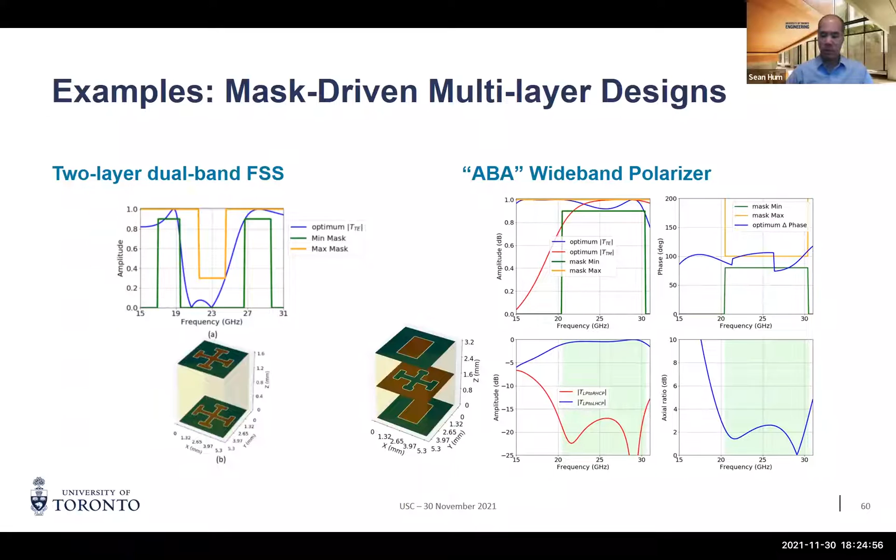But we tried to push this a bit harder and do a bit more of an explorative-based design and force it to invent new atom designs. So we gave it this set of masks for the TE and TM transmission coefficients, and that came up with this 2-layer metasurface that looks like some sort of interpolation of the Jerusalem cross and the patch. It's very interesting to see the algorithm doing this generation of new designs, and I think this is very exciting.

I think it's an exciting time to be exploring machine learning or involving it in this step, given the advent of the 3 V's that everyone talks about in machine learning: volume, velocity, and variety of data. So I think this is just the beginning, and certainly the approach I've shown you here is really just one possible way to solve the problem.

Okay, I know we're getting close to the end here. I would just like to show you some experimental work just to show you it's not all completely theoretical. My group does a lot of collaboration with aerospace companies. I thought it'd be useful for you to see some space applications.

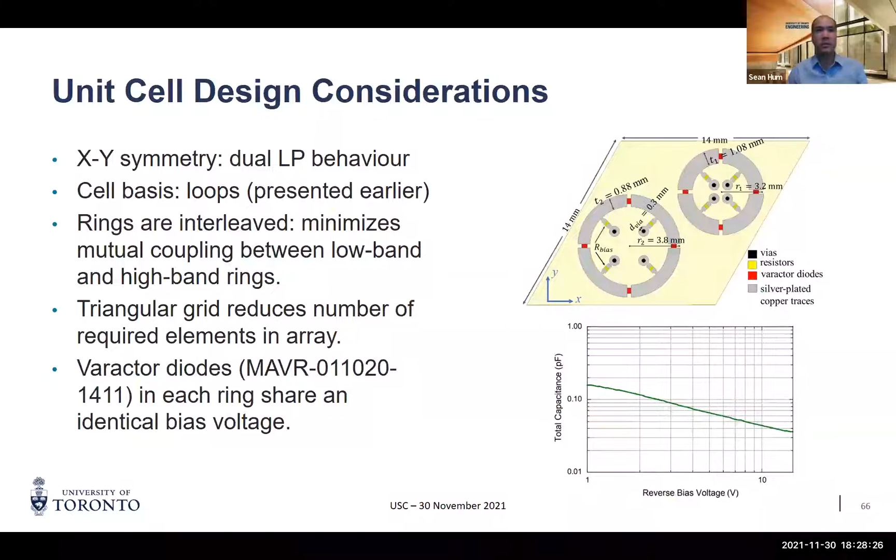We've also placed these elements on a triangular grid. So all these large rings end up on the triangular grid, and all these small rings end up on another triangular grid that's offset from the other one. This is really just to save the number of elements in the array, because for a given scan angle, a triangular grid will do it with fewer elements.

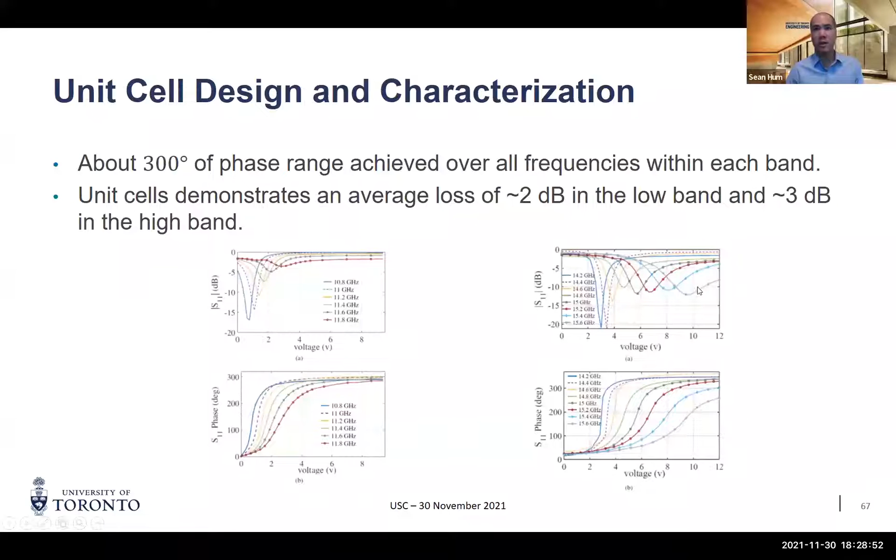So the unit cell operates in the KU band. The downlink is at around 11.2 gigahertz, and you can see we've got a reasonably looking S curve from the device here. The uplink is at 15 gigahertz, also a reasonable looking S curve. Some losses - this is the price to pay when we use semiconductor-based reconfigurable unit cells, but we gave it a go anyway. You can see a small sample of the reflector array fabricated here on a 4-layer board.

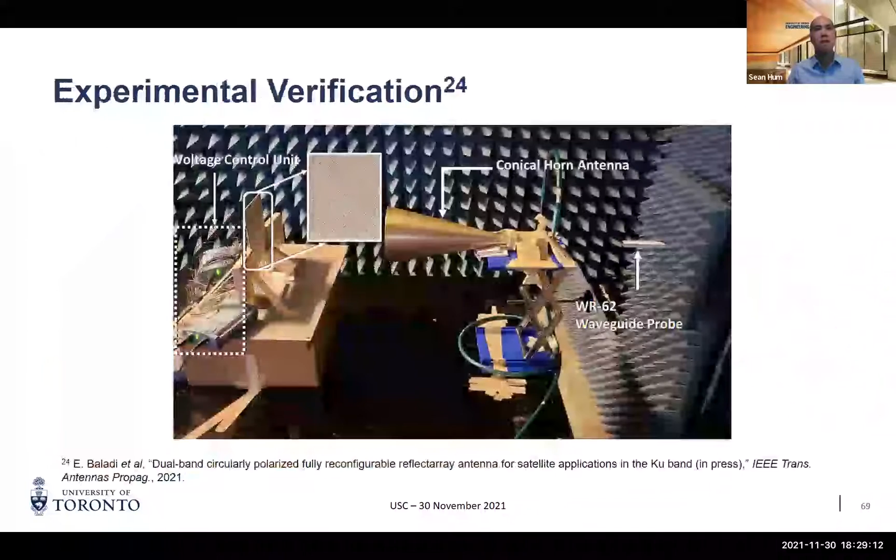Half of it's for the RF part and half of it's for the DC electronics. This is that sample on the range being tested with our near field scanner, and it works pretty well in both bands.

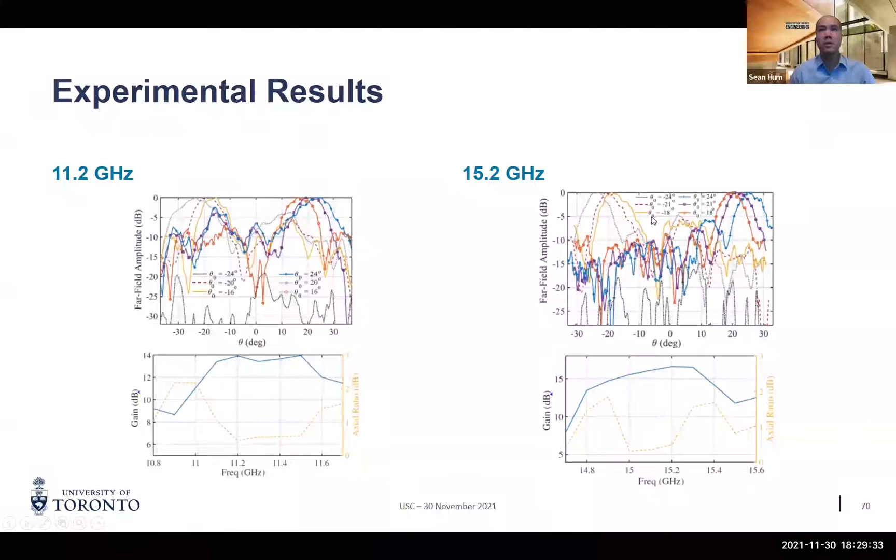It's producing beams over roughly a minus 30 to 30 degree range in front of the reflector array over a reasonable bandwidth, so we were pretty happy with this. You don't see the beams at the center just because there's too much feed blockage in this particular setup for us to measure it at broadside.

These satellites create what's called a 4-color multi-beam pattern on the ground, and a color is a frequency polarization permutation. So we have, let's say, a frequency F1 and F2, and a polarization P1 and P2, which are typically LHCP

We'd really like to have just one reflector do this, right? But what would you need? You would need a reflector that responds differently to F1 and F2, and you'd need a reflector that can respond differently from P1 and P2. But that's exactly what AESs do, right? So if we can solve that problem, then we can reduce the number of reflectors by potentially a factor of 4.

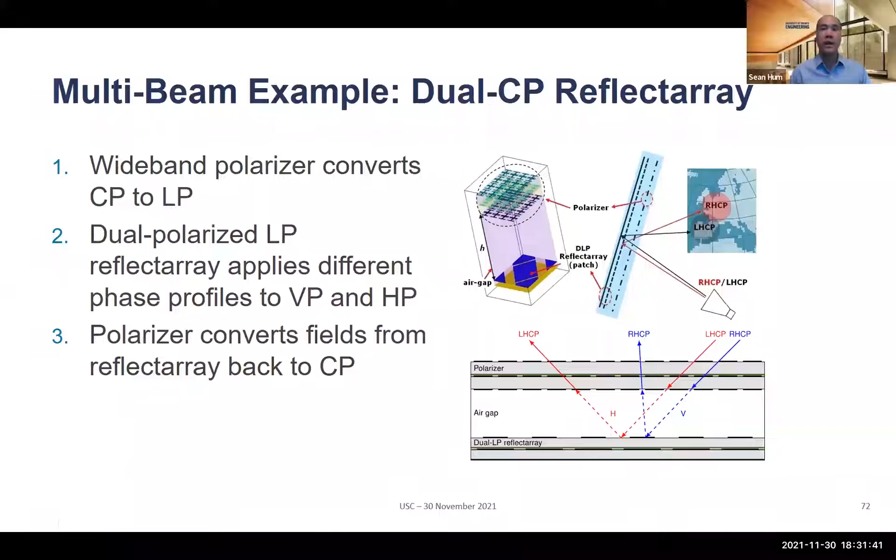So we devised a dual band polarizer that's shown here. It's a 3-layer AES that takes RHCP and LHCP and converts them to linear polarization. But the interesting thing is that in one band at 20 gigahertz, it turns RHCP into, let's say, X, LHCP into Y. But in the other band, it does it the other way around, RHCP to Y, LHCP to X. And that's actually an important requirement for these 4 color systems.

Right? LHCP, RHCP, and also F1 and F2. So you can see that these beams are all pointed in the directions more or less corresponding to the table that we wanted. And sort of proving the concept that a reflector array engineered in this manner might one day replace that 4 reflector system.

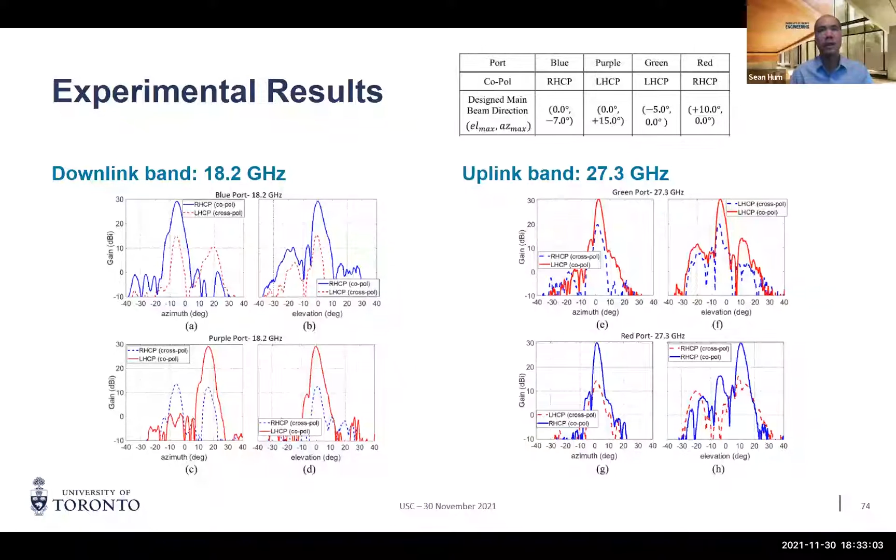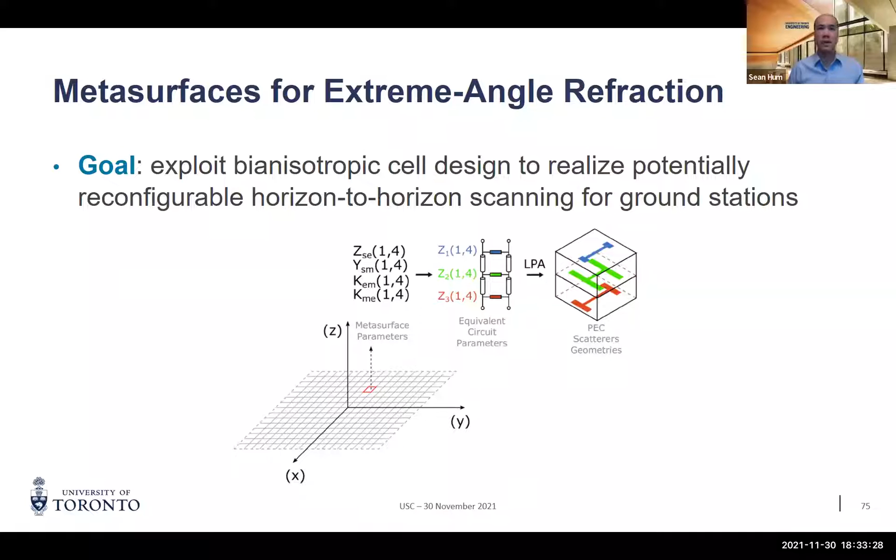The last example here, I'll show you an interesting AES for doing extreme angle refraction. This is a bi-anisotropic unit cell design realized using a 3-layer AES design. This is also for a ground station application we're working on, where we want to try to achieve horizon-to-horizon scanning on the ground, which is pretty extreme angles. So we would like to be able to use AESs for this purpose.

So you can actually analytically determine if you want to take a plane wave and redirect it to an extreme angle, or any angle for that matter. You can determine the variation in surface parameters analytically from the surface. But then the problem is that once you realize those parameters and put the AES together like this, what we found is that when illuminated with a normally incident field, it actually didn't do a very good job.

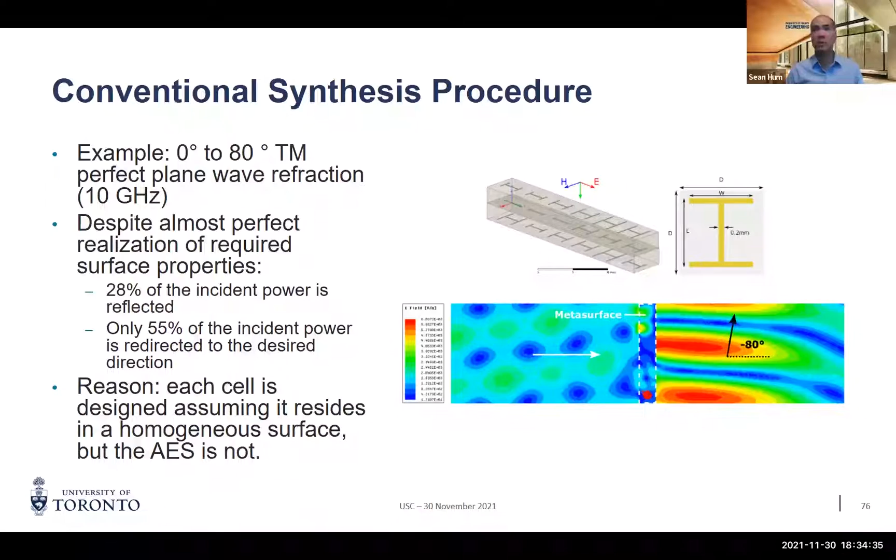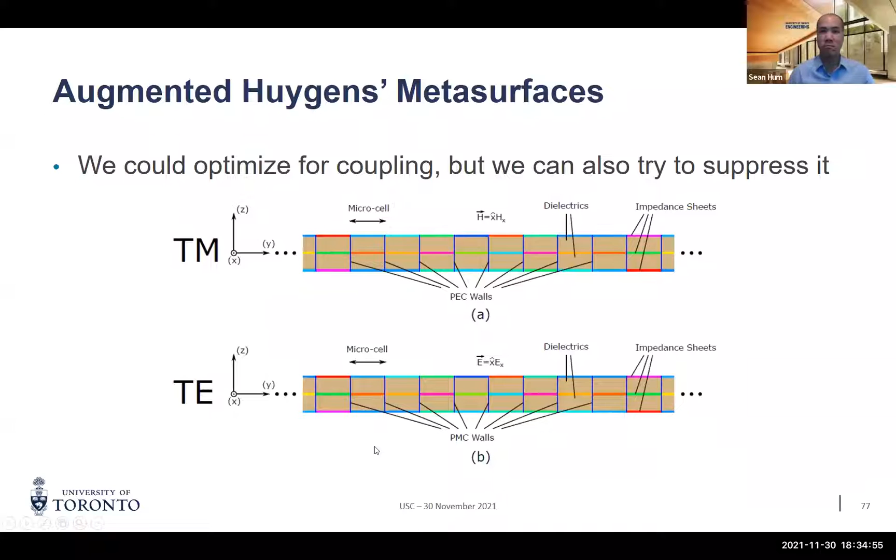You could use that optimizer I discussed earlier to handle this, but maybe there's a simpler solution. One obvious solution is to introduce baffles between the unit cells to limit the coupling. For TM polarization, those baffles can actually be PEC walls between each of the unit cells. For TE, you would need perfect magnetic conductors, which is a bit more challenging, so we'll focus on the TM case here.

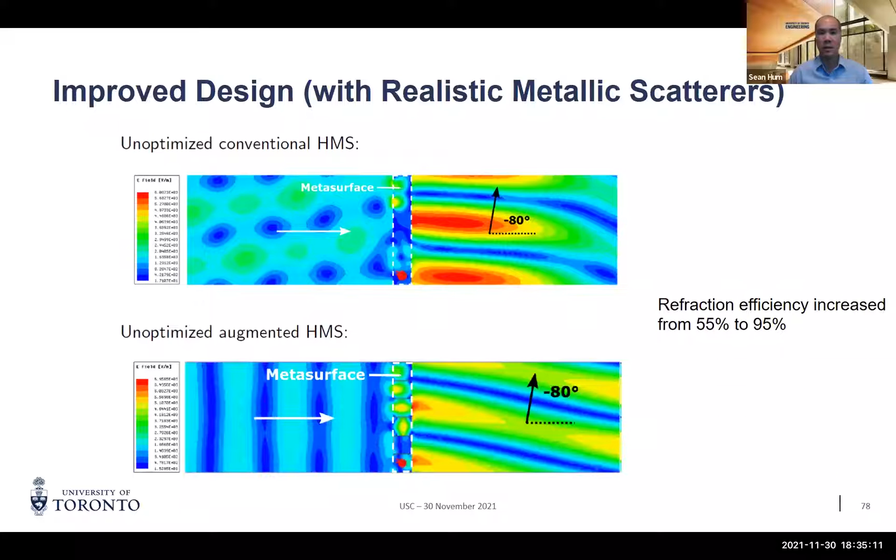After introducing these baffles in the metasurface that you see here, now this metasurface is doing its job. It's a much cleaner plot on the bottom compared to the top. You can physically realize this using vias. You need a lot of them, but it's perfectly doable with standard commercial processes.

A simulation with vias shows that it works pretty much just as good. 97% of the power was directed as expected, but there are some losses. These baffles tend to exacerbate ohmic losses in the dog bone structure, so total efficiency was around 77%.

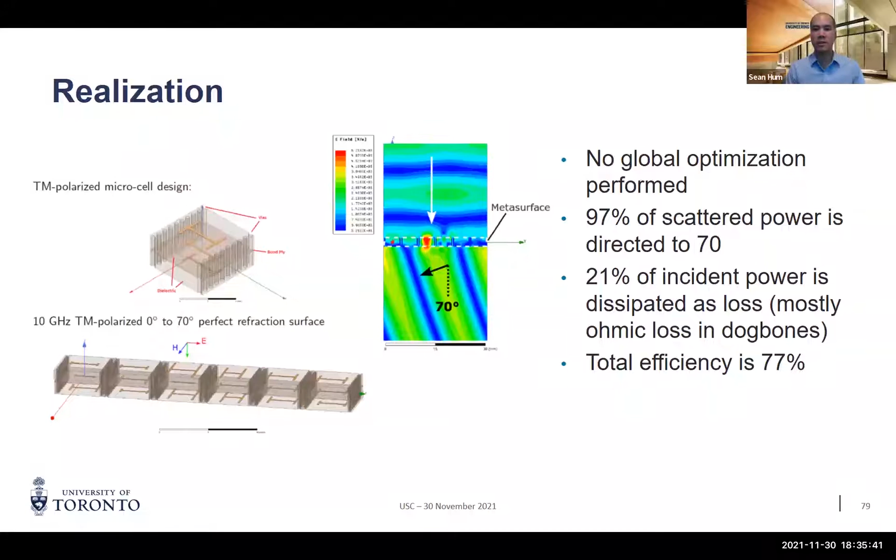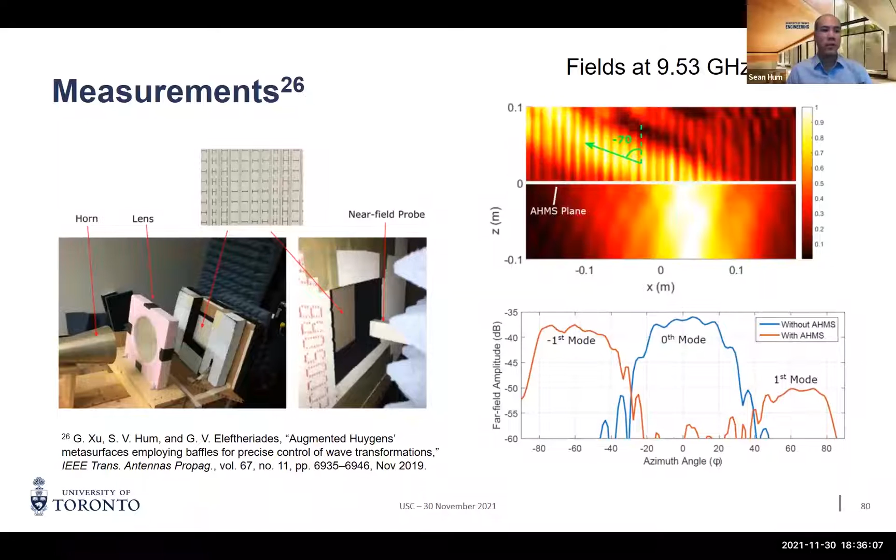So many different ways to skin the cat when you're dealing with this mutual coupling problem. I hope it was successful in showing you all stages of the design process, spanning the macroscopic and microscopic levels, as well as the demonstration level for a few interesting applications.

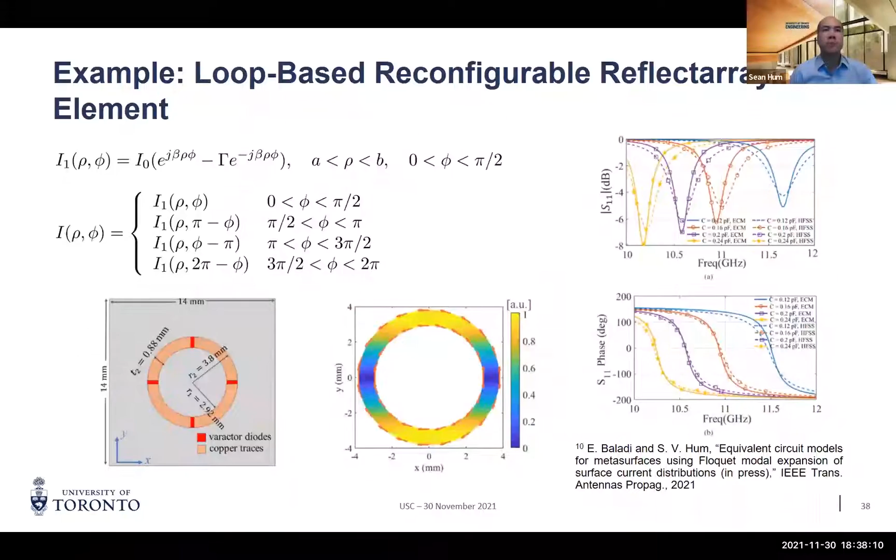So for each of these cells that I analyzed here, I proposed a current distribution. For example, for these dog bones that we just saw a moment ago, if you're designing with these dog bones, you can't form the equivalent circuit model unless you know the current distribution, because you need its Fourier transform to get the turns ratio. So step one is to identify the current distribution.

To do that, you need to know a little bit about what would happen to this dog bone structure if it were illuminated with a plane wave, for example. What we might expect is, just from antenna theory, some sort of current maximum in the middle that tapers off towards the edges, and then conservation of current at this junction, like KCL, to handle it.

But you need to be able to form these expressions as part of step one.

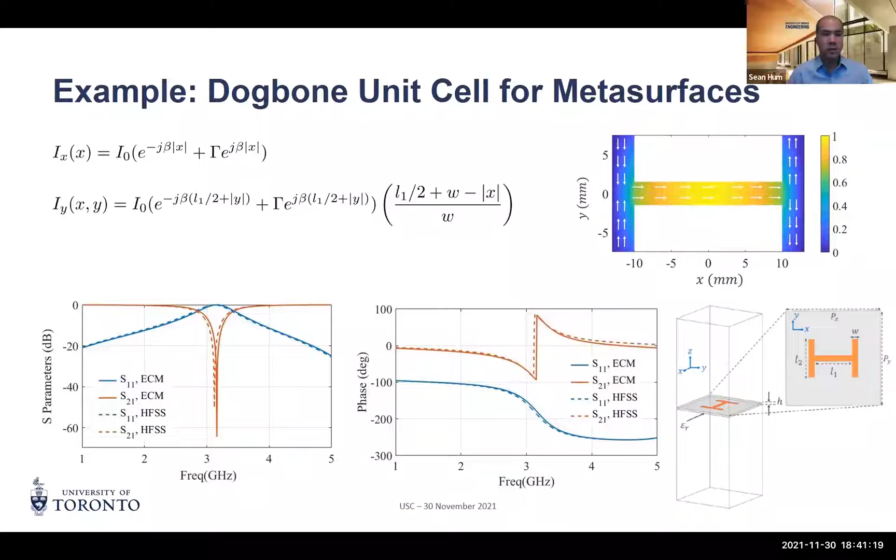Probably, we didn't, so I'll be honest, we didn't study the impact of PCB thickness on the result. But these designs are not extremely sensitive to the geometric parameters of the structure. So I would suggest that there's some wiggle room, given that these are quasi-resonant structures, in terms of dealing with different substrate thicknesses.

Like I can tell you that these substrates flex and bend, and it's actually quite difficult for us to keep them perfectly flat. And yet the structure still worked pretty well. I hope that answers the question.

There's another question. In multi-layer designs, are the coupling effects of the elements considerable in typical equivalent circuit models, especially for thin substrates? Okay, very good question. So yes, of course, we want to capture coupling effects.

If we go back to the equivalent circuit model, let's show you a picture of that again, just to refresh ourselves here. Maybe I'll go to the driven one. So it's true, when you have, let's say, two metal layers close to each other, there can be coupling between them.

And that coupling can manifest itself as low order coupling or high order coupling. By high order coupling, I mean the evanescent Floquet modes talking to each other. And by low order coupling, I mean that even if the cells are reasonably distant from each other, you still have the fundamental mode causing interaction between the two layers.

So the equivalent circuit model definitely works well for the fundamental mode coupling, because you can predict it in the same manner as I showed here. In principle, the equivalent circuit model can be adapted to also capture the higher order coupling, because you can see here that I could excite this port and I actually could see what comes out of all of the other ports.

And there's many of them, right? This goes on ideally forever. So there's many ports, and I could see how much of the higher order modes are being excited, the evanescent modes are being excited, and then couple that to another equivalent circuit model for the next stage.

The problem is that we don't know what the current distribution necessarily looks like for these scatterers when they're illuminated with the higher order modes. So just a moment ago, Kazim was asking about the current distribution on the atoms, and we can see that we have to suggest something, and that's for a fundamental mode illuminating that atom. If it's being illuminated by a higher order mode, it's probably a lot harder to guess what the current distribution may be. So that's a potential gotcha with using this equivalent circuit model for really, really thin structures.

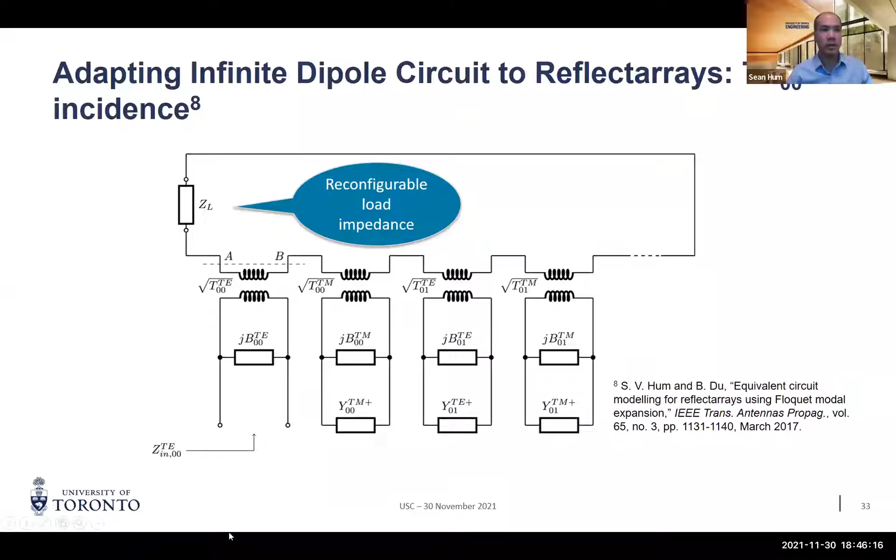I showed you how it's very good at interpolating. I showed you this unit cell where it was put in a more generative mode, and it came up with this interesting scatter shape that's neither a Jerusalem cross nor a patch. So this is promising, because this design lies in the space between primitives that it was trained on.

But what these networks are not good at doing is extrapolating. So if we want to come up with some radically new, or what you're calling a relatively complex unit cell geometry that lies well outside of the training interval, they're not so good for that. And that would require more augmented training as you go, as you generate these new shapes, or other approaches.

We're looking into using GANs now to try to address this problem, to deal with more complex geometries. But considering we have a 3-layer unit cell with these many different primitives that can realize a huge range of surface parameters, it's already doing pretty well. So I'm optimistic, despite the large training cost.

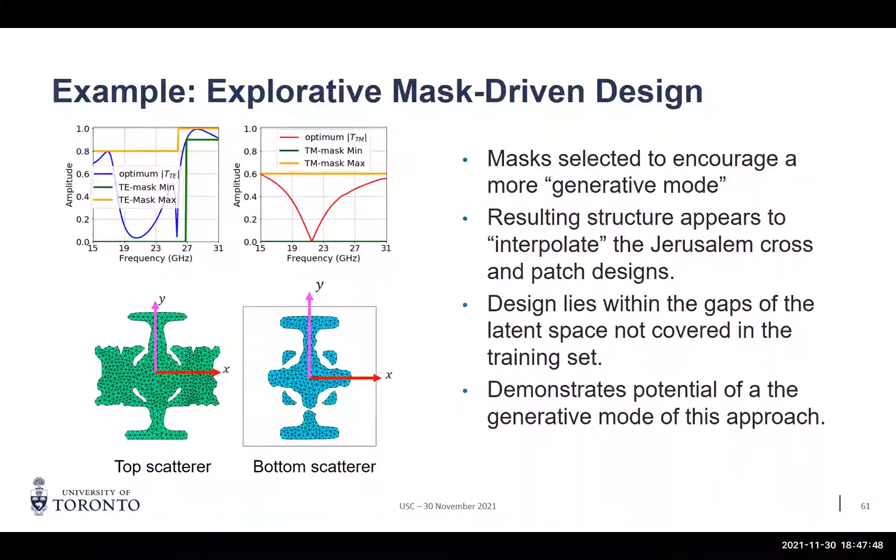I see Ashwin has joined us. Ashwin, you're not in California. No, I'm not in California, Sean. How are you doing? Great talk. It's my pleasure, I learned a lot. Fantastic talk as usual. I just have a very quick question - do you mind going to slide 51? Sure.

So you mentioned that using the homogenized model versus the full structured model, you would expect that the structured model better achieves the criteria you've set out here. Is it basically because you have more degrees of freedom available in designing that structure, and in compensating for things like the mutual coupling, which is lost in the homogenized model? Is that right?

What I was trying to say is that when you look at these two curves, they don't seem to match, and that's because of differences in the way mutual coupling is handled between the homogenized model and the actual physical model. In the homogenized model, we just have impedance sheets next to each other, and while the mutual coupling is handled, it's just mutual coupling between uniform impedance sheets. Whereas with this physical structure, the mutual coupling is very likely different from what was happening in the 3 impedance sheet model. So that's to explain the difference.

Yeah, I fully understand that, thanks for that. I'm more about achieving the side lobe constraints though - is there a good reason why it's more difficult to achieve the side lobe constraints using the homogenized model than with the full structured model? So I thought it doesn't always work this way.